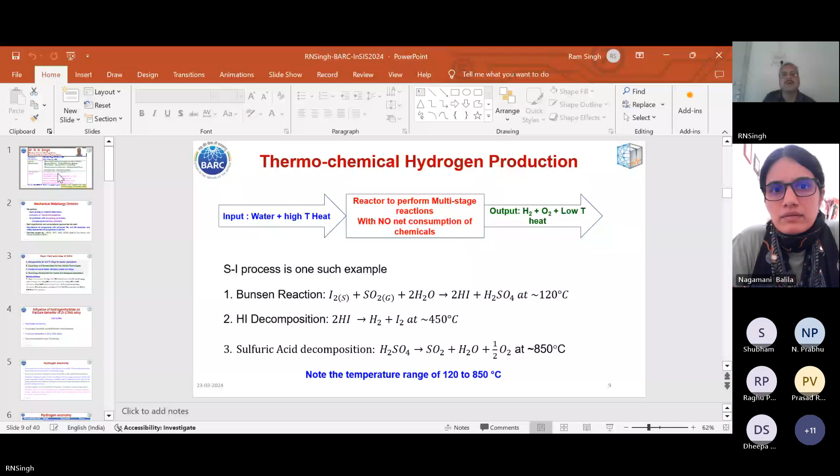Are you able to see this slide? Yes, yes, we can see. Just wait, let me go for the slide.

Are you able to see it now? Oh, it's still in PPT mode. So you have to share your full screen, not just the tab, because sometimes it doesn't work. Okay, fine. So you can stop sharing and reshare. Correct, entire screen. Share.

Now, are you able to see the slides? Yeah, slides we can see, and also the full screen. Thanks, I've gone to the next slide. Are you able to see the next slide also? Yes, the first slide, now the next slide. Yeah, there's a little bit of lag, but it's fine.

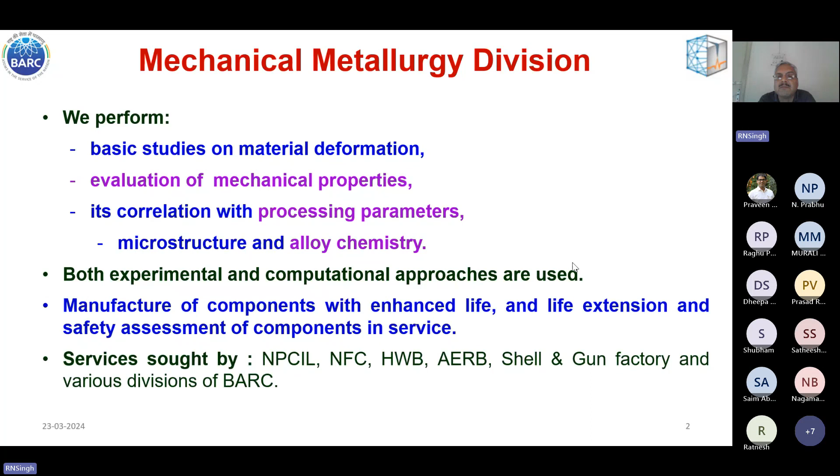Thank you, Professor Jaya, for your kind introduction. Just before we start the presentation, I want to share what we do in the Mechanical Metallurgy Division. Basically, we perform basic studies on material deformation, evaluation of mechanical properties, and their correlation with processing parameters, microstructure, and alloy chemistry, using both experimental and computational approaches. Our input is required for manufacture of components with enhanced life, life extension, and safety assessment of components during service. Our expertise is sought by various units of DAE like NPCIL, NFC, Heavy Water Board, Atomic Energy Regulatory Board, and various divisions of BARC.

Am I audible enough? Yes, yes, everything is yes, sir.

The major R&D activities being pursued by my division fall into four major categories. The first is new generation zirconium and titanium alloys for various reactor applications. The second is superalloys and borated steels, again for nuclear applications. Third is nuclear structural steels, refractory metals and alloys, development of these materials. And finally, the fourth group is technology development for nuclear and aerospace applications.

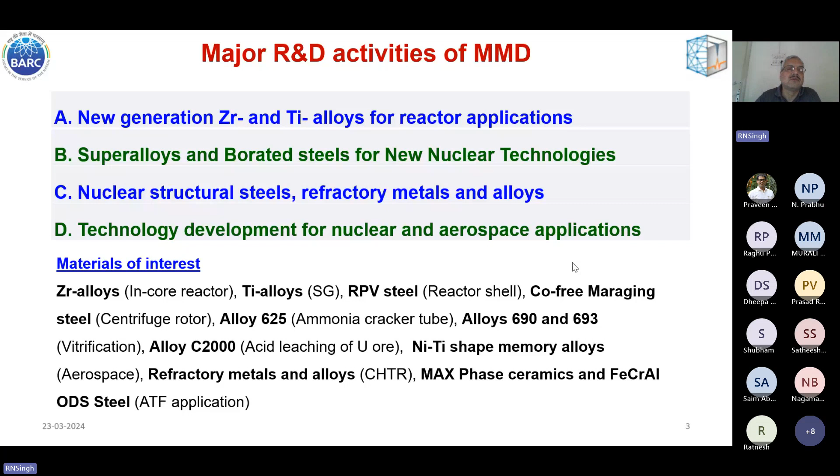Materials of interest to us are zirconium alloys, titanium alloys, RPV steel, cobalt-free maraging steel, alloy 625, alloy 690, alloy 693, alloy C2000, nickel-titanium shape memory alloys, which earlier Dr. Madhur Gopal was working on, and now my colleague Dr. Vikas Manji is continuing this work. Also refractory metals and alloys for compact high temperature reactors, and MAX phase ceramics for accident tolerant cladding. I think FeCrAl is also for the same purpose.

Today's talk, I have given the topic as the influence of hydrogen or hydride on fracture behavior of zirconium 2.5 Nb pressure tube material. However, based on the work we have done, and since we are all talking about hydrogen economy now, I just wanted to flag this issue and suggest what areas we mechanical metallurgists, or those concerned with structural integrity, should be working on.

So this is my personal view, it is not my department's view. Before I go on to the actual topic of hydride embrittlement of zirconium niobium alloy, I'll be talking a little bit about hydrogen economy, present various mechanisms of hydrogen or hydride embrittlement, and finally I'll come to the fracture behavior of this alloy.

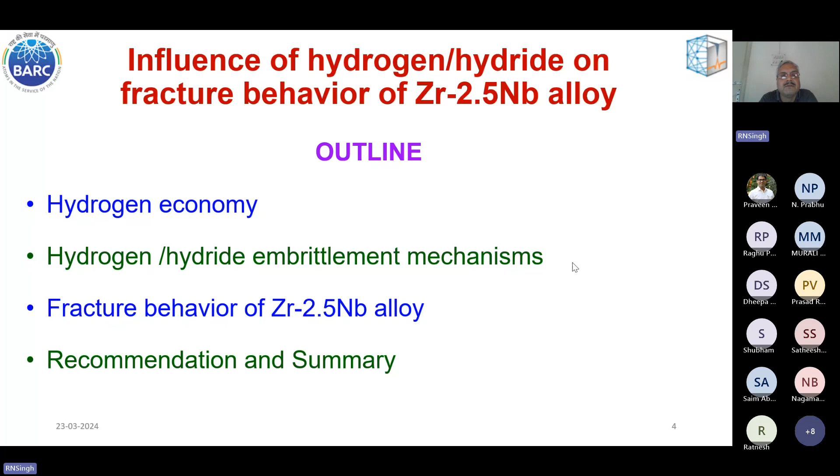In the hydrogen economy, to arrest the effects of climate change, the United Nations has identified 17 sustainable development goals. Goal 7 aims to provide clean and affordable energy. Over the next few decades, the hydrogen economy can either partially or fully replace the fossil fuel economy.

This third statement is very powerful, and I've tried to summarize its present status. Production, packaging, storage, transfer, and delivery of hydrogen are all energy-consuming steps. Over the next decade, competition between adherence to the idealistic scientific goal of replacing fossil fuels with hydrogen, and finding a practical economic solution involving a combination of several technologies, will decide the growth of the hydrogen economy.

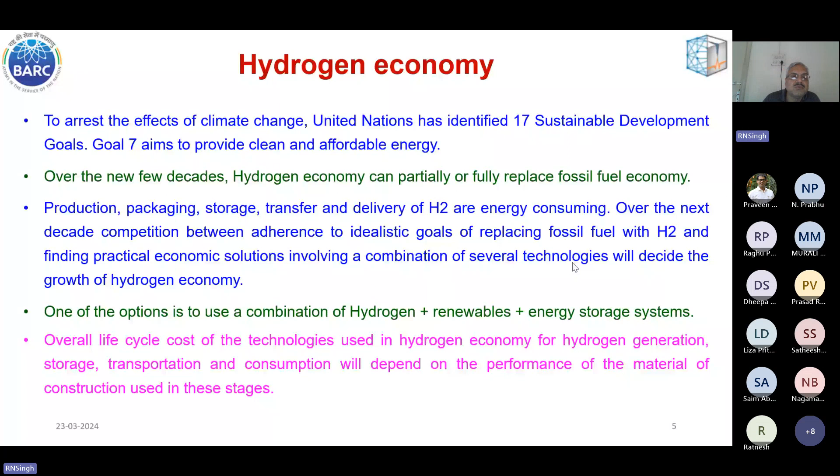One option being seriously explored is the combination of hydrogen, renewables, and energy storage systems. The overall life cycle cost of technology used in the hydrogen economy for generation, storage, transportation, and consumption will depend on the performance of materials of construction used in these stages.

So these are the 4 stages: hydrogen generation, storage, transportation, and use. Coal, oil, and steam reforming are still the 2 major forms in which hydrogen is being generated. But water electrolysis has a scale-up advantage; if adopted, large-scale hydrogen production can be achieved.

Water electrolysis can be done by obtaining electricity from nuclear, solar, wind, hydro, or wave sources. Water splitting using thermal heat is also possible, with heat provided by nuclear or solar sources. Biomass fermentation and its pyrolysis is another method of hydrogen generation.

For storage, hydrogen can be used in pure form without transformation: as gaseous hydrogen at very high pressure, or liquid hydrogen at low temperature, or a combination of both low temperature and high pressure, again as gaseous hydrogen. It can also be stored in a metallic lattice.

It can also be stored in chemical forms like ammonia, methane, methyl alcohol, synthetic fuels, and green ammonia. So these are the methods in which it can be stored. Each method has its own advantages and disadvantages, which we'll cover later.

For transportation, gaseous hydrogen and liquid hydrogen can be transported in the form of tankers, pipelines, or trailers. For end use, stationary hydrogen is used in refineries for production of steel.

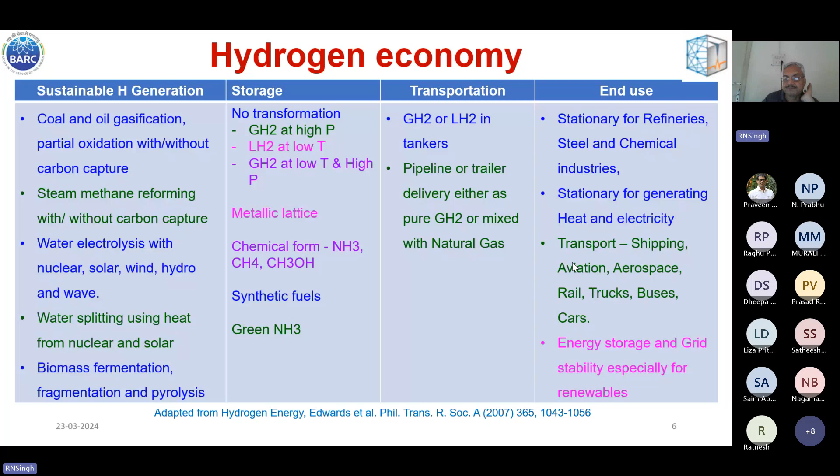For hydrogen, different color codes are being followed, though there is no standard on this. The first is gray hydrogen, which is generated from fossil fuels with CO2 emission. The output is hydrogen gas and CO2, with no effort made to capture the carbon dioxide produced in this process.

This does not lead to any change in environmental impact because the CO2 is already being released; it does not reduce the impact of CO2 on the environment. But if you produce hydrogen from fossil fuels while capturing this carbon dioxide, here too it is not full capture, only partial capture.

Now, pyrolysis of fossil fuels: natural gas plus air is the input, subjected to high temperature exposure, and the output is hydrogen plus carbon in solid form. Here, the entire carbon is getting captured, so this is good for the environment.

The third and last method is electrolysis, and depending on the source of electricity, we have different color codes. Green hydrogen is where electricity is obtained from renewables. Pink is where electricity is obtained from nuclear. Yellow is where electricity is obtained from the solar grid. Ultimately, in all these cases, hydrogen and oxygen are produced.

Presently, global hydrogen production from natural gas and coal is about 76% and 23% respectively. Approximately only 1% of hydrogen comes as a byproduct of alkaline electrolysis used to produce chlorine and sodium hydroxide, and only 0.1% of hydrogen produced is by water electrolysis.

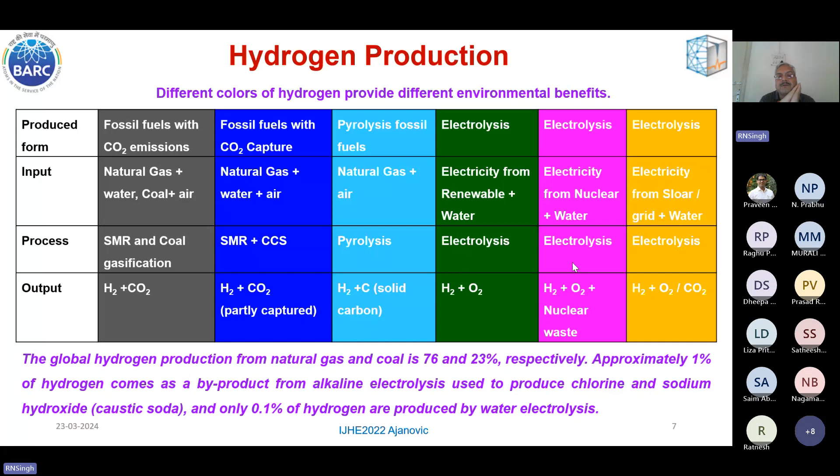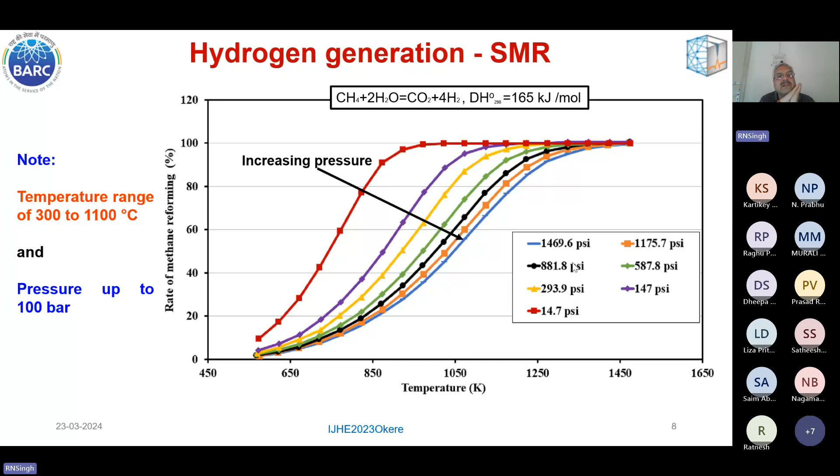Next few slides will show the environment in which materials of construction have to be used. For steam methane reforming, this plot shows the rate of methane reforming with temperature. As you increase the pressure, the yield decreases, but the operating temperature also increases. The message here is that the temperature ranges from 300 to 1100 degrees Celsius, and the pressure is up to 100 bar.

Another method of producing hydrogen is thermochemical hydrogen production. Here you have a reactor which performs multi-stage reactions with no net consumption of chemicals. The input is water plus high temperature heat, and the output is hydrogen, oxygen, and low temperature heat. One example of thermochemical hydrogen production is the sulfur iodine process.

Here, first three reactions take place. The first is a Bunsen reaction where iodine and sulfur dioxide combine with water to form hydrogen iodide and sulfuric acid at a low temperature of 120 degrees Celsius. The second reaction is hydrogen iodide decomposition, which takes place at about 450 degrees Celsius. The third reaction is sulfuric acid decomposition, taking place at a very high temperature of 850 degrees Celsius.

Ultimately, both SO2 and I2 are recovered as products. So there is no net consumption of chemicals, and this kind of reaction can produce hydrogen. The input is water plus high temperature heat, and the output is hydrogen, oxygen, and low temperature heat. The temperature here ranges from 120 to 850 degrees Celsius.

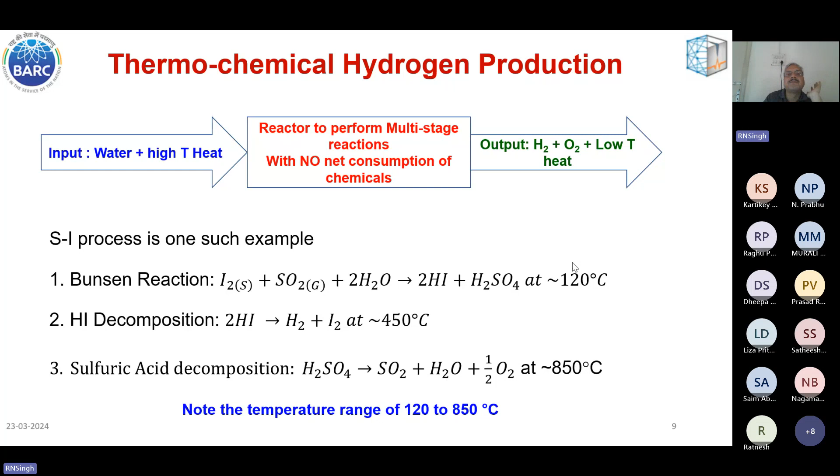For electrolytic production of hydrogen, there are three methods. First is the alkaline method, composed of electrodes, a microporous separator, and an aqueous alkaline electrolyte. In the proton ion exchange membrane method, platinum black is used along with iridium, ruthenium, and rhodium as electrode catalysts, with a Nafion membrane. For solid oxide electrolysis cells, it is essentially an SOFC working in reverse.

In the alkaline case, the temperature is only 60 to 80 degrees Celsius, pressure up to 30 bar, and efficiency about 60 to 70%, but capital investment is low. In the proton ion exchange membrane case, temperature is again 50 to 80 degrees Celsius, and pressure is 30 to slightly higher, around 80. But for SOEC, the operating temperature is 650 to 1000 degrees Celsius, with very high efficiency of 74 to 81%, and lower operating pressure.

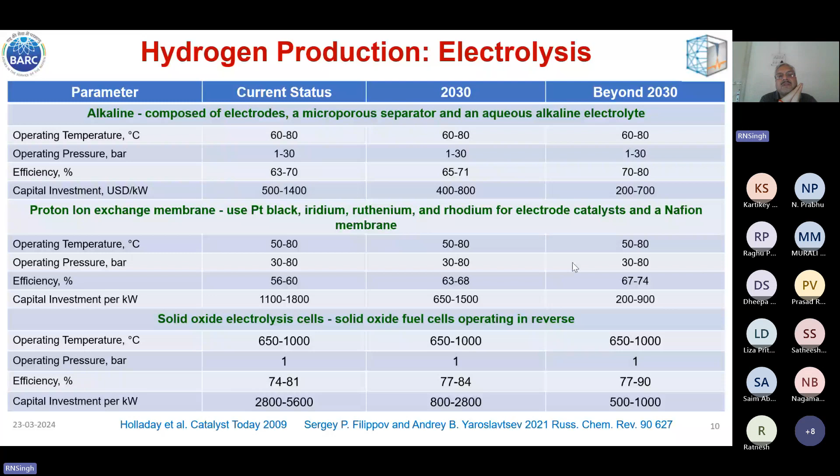So various hydrogen production methods are there, and hydrogen storage methods are there too. Whenever we talk about hydrogen storage, two parameters become important: gravimetric density, which is the percentage weight of hydrogen in the total matrix, and volumetric density, how much kg of hydrogen is stored per cubic meter.

These storage methods are listed with their operating temperature and pressure, along with advantages and disadvantages. The most commonly used method is still high pressure gas hydrogen cylinders. Here, gravimetric density is a maximum of 13%, and volumetric density is up to 40 kg per cubic meter. This can be used at room temperature, with pressure as high as 800 bar. The advantage is it's a simple, well-developed technique with a very short refilling time, which is its greatest advantage.

The disadvantage is very high internal pressure requiring thick cylinder walls, so low density and large tank size are required, and there is a risk of rupture and explosion. That's the disadvantage with high pressure hydrogen cylinders.

Liquid hydrogen is also stored in cryogenic tanks. Gravimetric density depends on size, and volumetric density is much higher, 70.8 kg per cubic meter, but the temperature is minus 250 degrees Celsius. Pressure is not a concern, about 1 bar. So it has very high hydrogen density and is easy for transportation.

It also has a very short refilling time, but requires refrigeration cost, with evaporation and leakage losses. There is also risk of structural failure of tanks under high stress, especially since some BCC metals show brittle behavior at low temperature.

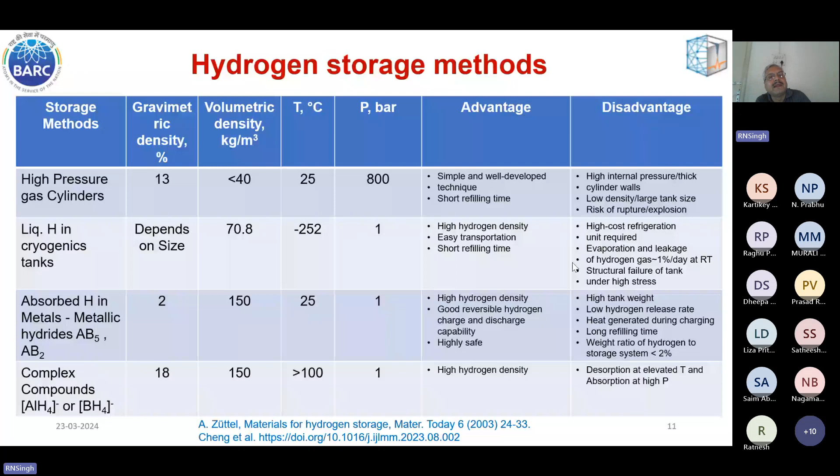In the literature, you will see that for hydrogen cylinders, we have got 5 classes: type 1, 2, 3, 4, and 5. These cylinders are made of steel or aluminium, and depending on material of construction, the maximum pressure they can hold is given. For aluminum, it could be 175 bar; for steel, it could be 200 bar. This is already being used for submarine applications.

However, in order to increase the pressure, you can go for type 2 cylinders, where apart from the metal, some composite is used as a winding around the cylindrical portion of the tank. With aluminum and glass combination, we can go up to 263 bar. For steel and carbon fiber combination, we can go up to 300 bar. This is also used for stationary fuel cells and such.

In type 3 cylinders, there is a metal liner to prevent permeation of hydrogen. This liner could be aluminum or steel, copper and such. The composite fiber used could be fiberglass, aramid, or carbon fiber overwrap. Here the pressure can go as high as 700 bar, and this is also being considered for use in vehicles.

The last type, instead of a metallic liner, has a polymer liner. The cylinder is made of carbon fiber overwrap and polymer liner, making it lightweight, with capacity to hold hydrogen up to 350 to 700 bar. Again, this application is for vehicles only. Nowadays people are thinking of making the cylinder with fiber itself as a composite, and it can go up to 1000 bar; this is being considered for aerospace applications.

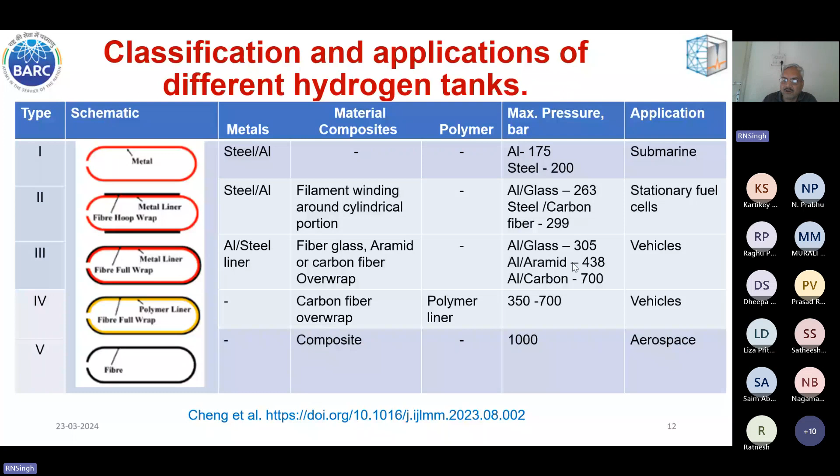Now the summary of these hydrogen storage systems is provided in this slide. On the y-axis we have volumetric density, and on the x-axis we have gravimetric density. You can see liquid hydrogen lying here, and if you look at any high Z element for storing hydrogen, depending on the chemical formula, the gravimetric density will be limited. But if you see mixed hydrides like magnesium borohydride, aluminum borohydride, ammonia borohydride, and others, all these have very high volumetric density and gravimetric density.

Ultimately, while picking the material in which hydrogen can be stored in metal, one can always think of low Z elements—that is what can find some application. This is the message coming out of this slide.

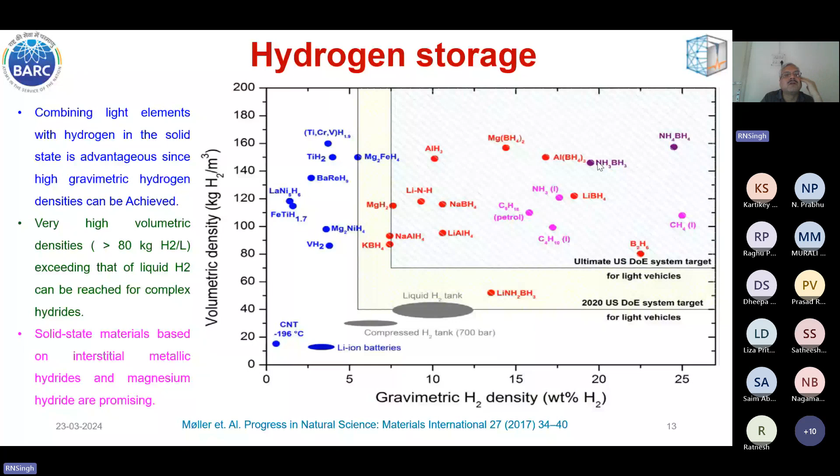Now, if you see hydrogen consumption, it can be used for transportation, for generating electricity for powering the vehicle. Some people are also thinking of using hydrogen for internal combustion engines, for SOFC, and rocket fuel. It is already being used, in the form of gaseous hydrogen or liquid hydrogen, and is already being implemented and likely to be scaled up in the near future.

As fuel and feedstock for industry, it is used as a reagent or reductant for refining petroleum, producing fertilizer, other chemicals, steel, and processing of foods—again in gaseous form. It's used for reducing sulfur in petroleum, producing ammonia or methyl alcohol. Nowadays it has already been demonstrated that it can be used for producing steel also, especially for reducing, as in DRI, direct reduction of iron. It is also used for converting unsaturated fats to saturated fats.

Here, for all uses in industry, one can think of captive hydrogen generation. Hydrogen is also used for power generation and grid balancing, here direct combustion or SOFC, again in gaseous form. It is considered for use as a replacement or supplement for fossil fuels, and fuel for residential and commercial buildings through direct combustion. It can be stored in storage tanks, especially for colder countries.

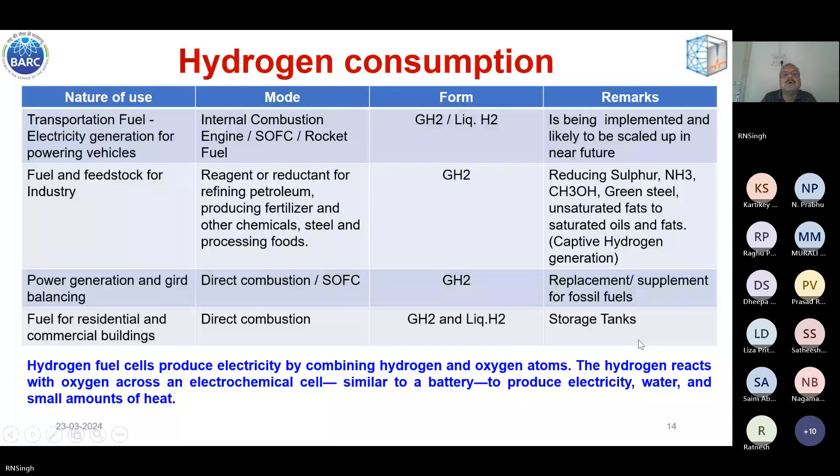Challenges posed by hydrogen are permeation of hydrogen through materials, resulting in effective leak through the materials, and degradation in mechanical properties of a structural material that compromises the structural integrity. Choice of material thus depends on the service conditions, mechanical, environmental, material condition associated with the component used.

Now, for material testing, hydrogen absorption, and diffusion out and diffusion in time, and test duration, that becomes important. Two types of test in hydrogen atmosphere can be done.

The material can be directly tested in high pressure hydrogen gas, which is an external source of hydrogen, or material can be pre-charged electrolytically with hydrogen and the test can be carried out. Hydrogen diffusivity is very important. For austenitic stainless steel, the diffusivity is less than 10⁻15 square meters per second, so a long time is required for hydrogen charging itself.

However, for a strain-induced martensite, time and pressure is significantly reduced. For pre-charged material, diffusion out time for hydrogen should be very, very large compared to the test time. Otherwise, if the test time is longer, hydrogen will diffuse out and the effect of hydrogen will not be captured. So this method is not suitable for carbon and low alloy ferritic steels or materials where diffusivity is higher than 10⁻10 square meters per second.

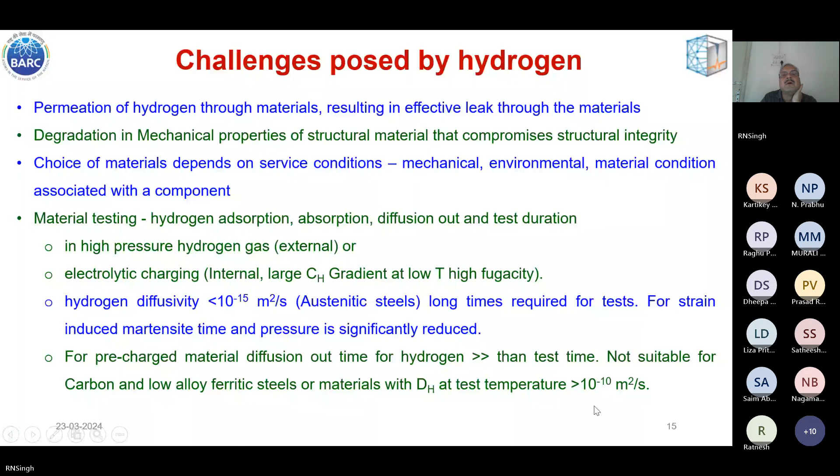Various forms of hydrogen embrittlement have been reported in literature. I have just considered only 3 of them. First one is hydride embrittlement, second is dissolved hydrogen embrittlement, and third one is hydrogen attack.

In case of hydride embrittlement, this embrittlement is caused by the formation of hydride precipitate. In case of steels and all, this hydrogen embrittlement is caused by the dissolved hydrogen in the matrix. And the third one is hydrogen attack, which occurs during service, where hydrogen can combine with other interstitials under the operating condition, and that can cause embrittlement.

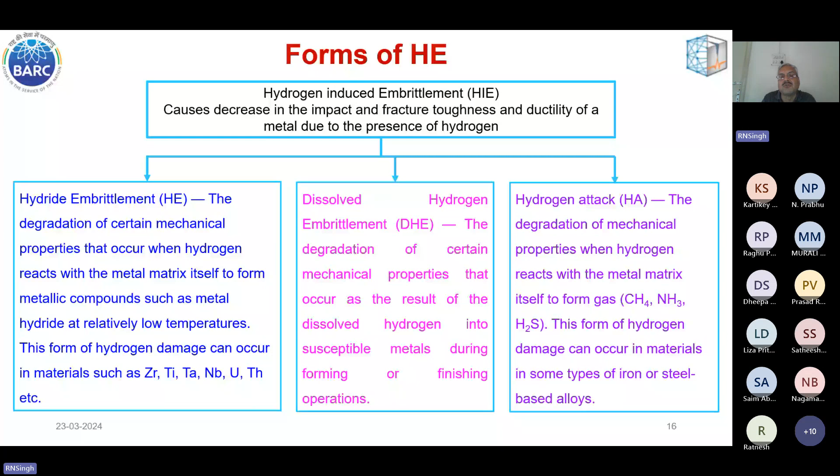Hydride embrittlement is exhibited by metals like zirconium, titanium, tantalum, niobium, uranium, thorium, etc. Common steel and all show dissolved hydrogen embrittlement. And hydrogen attack, I said, it is some types of iron and steel based materials during operation in power and process industry at a temperature about 500 degrees Celsius, that exhibit this kind of failure.

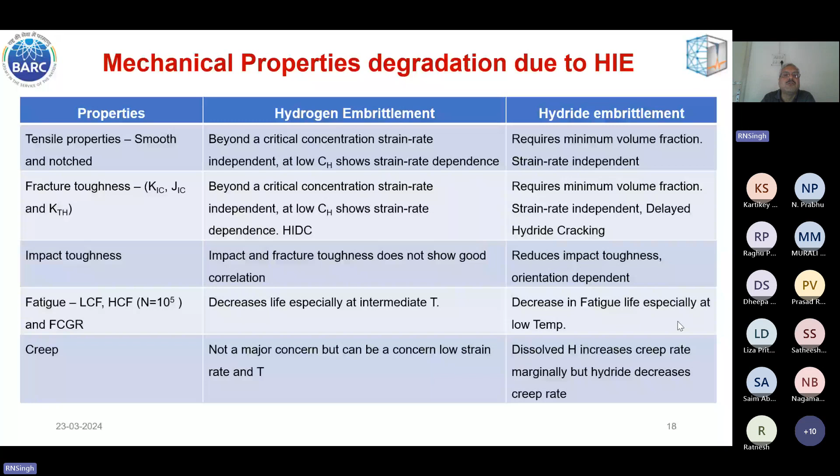Here are some illustrations of hydrogen-induced embrittlement. If you see applied stress versus time to failure, as the hydrogen concentration decreases, this curve becomes almost horizontal. This shows the effect of hydrogen: if hydrogen is present, even at low stress this component can fail.

The fracture stress also shows the effect of strain rate. At lower strain rate, you can see fracture toughness is very low and fracture stress is low. In the unembrittled condition, you have this dotted line, and because of hydrogen this has come down.

Here, log of crack velocity versus stress intensity factor is shown. Though threshold stress is not getting affected, in the plateau region crack growth rate is increasing with increase in hydrogen concentration. Here it is shown as stress intensity factor range, and here threshold is getting affected.

In air, the curve is like this. In hydrogen, the curve moves toward the left, meaning crack growth rate has increased, and the threshold stress intensity factor range has also reduced.

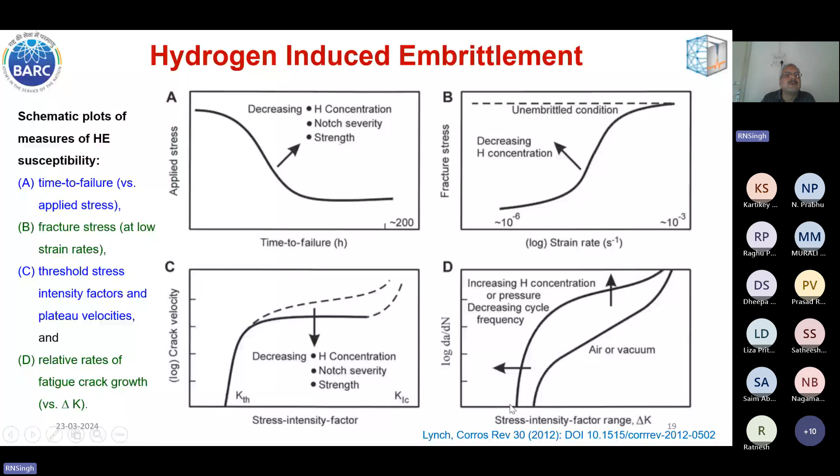Here hydrogen pressure effect is shown: the threshold stress intensity factor as a function of hydrogen pressure. As the hydrogen pressure increases, the threshold stress intensity factor is reducing.

Here, temperature effect is shown. At low temperature, the hydrogen embrittlement effect is not there. Again, at higher temperature also it is not there. It is the intermediate temperature regime where hydrogen embrittlement effect is observed.

Here, strain range versus cycles to failure is shown. With the effect of hydrogen, you can see the curve shift toward the left. Creep also, for a material like MAR-M246, is getting affected—this is the behavior in helium atmosphere, and this is the behavior in hydrogen atmosphere.

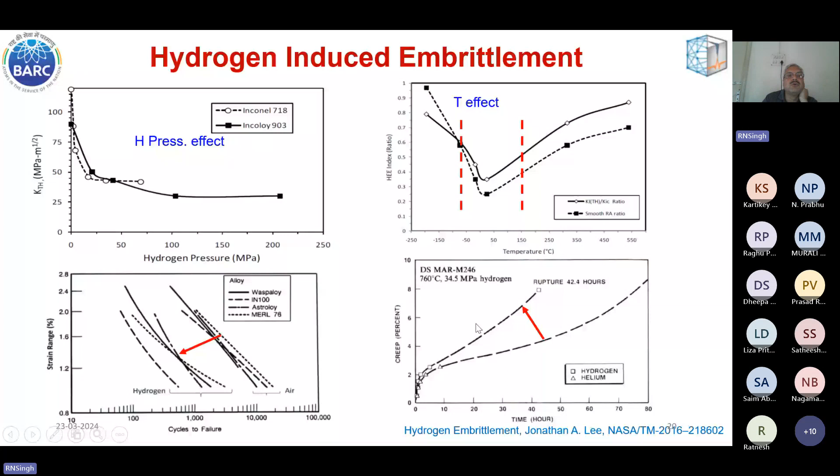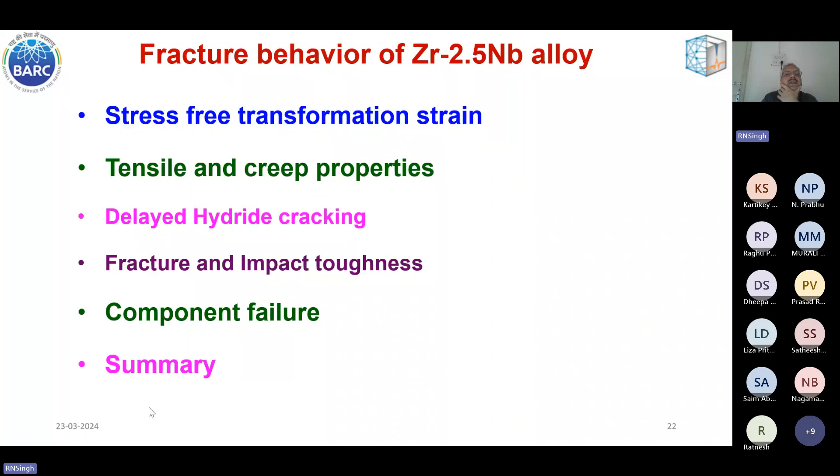Once hydrogen in excess of solid solubility precipitates out as hydrides in metals like zirconium, titanium, niobium, vanadium, etc., a stress-free transformation strain decides the shape of the hydride precipitate for solid state transformation. We know from basic physical metallurgy that in a 3D Cartesian coordinate system, if the 3 orthogonal transformation strains are equal, we end up with a spherical precipitate. If they are equal in 2 directions and less than the 3rd direction, we end up with a plate-shaped precipitate. And if it is lower in 1 direction compared to the other 2, we end up with a needle-shaped precipitate. In the zirconium-hydrogen system, hydrides exhibit a plate-shaped precipitate.

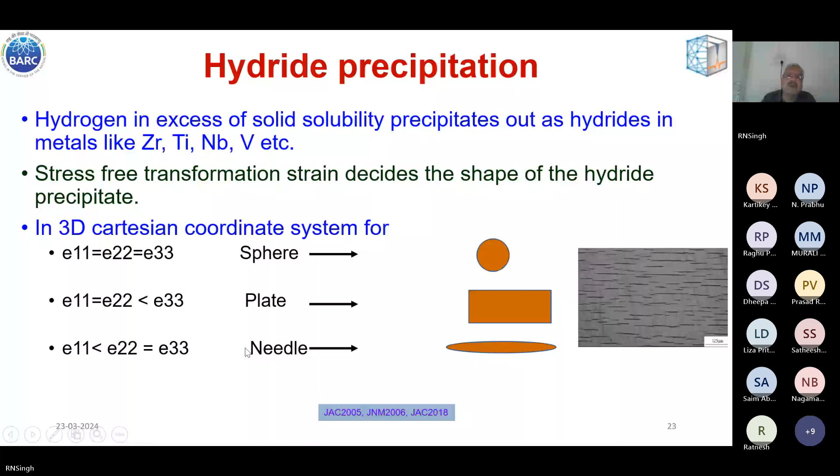So what we did is try to compute this stress-free transformation strain. Here we have alpha zirconium, which has a hexagonal close-packed structure, and delta zirconium hydride, which has a face-centered cubic structure. In 1973, in the Journal of Nuclear Materials, an article was published by Carpenter, G.J.C. Carpenter, suggesting that one can determine this stress-free transformation strain by determining the radius of the zirconium atom in the hydride and in the alpha HCP phase.

If you see this zirconium crystal structure, it has a c/a ratio less than ideal, so as a result he assumed an ellipsoidal shape of the zirconium atom. In case of hydride, since it has a face-centered cubic structure, we can assume a spherical shape of the atom. Then, based on the semi-major and semi-minor axis of the zirconium atom, one can calculate the transformation strain: E11, which is along the hydride platelet, and E22, which is along the normal to the hydride precipitate.

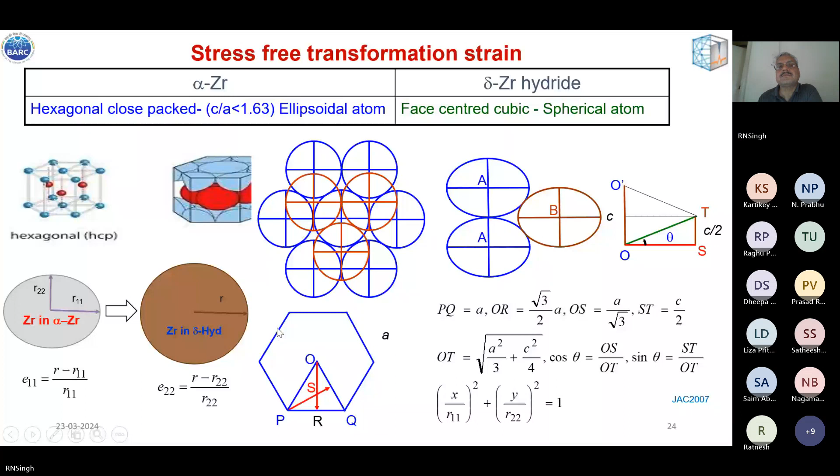Whatever stress-free transformation strain is determined using atomic dimensions is valid for the hydride precipitate. In Yamanaka et al., June 2005, they published the lattice parameter of zirconium hydride up to higher temperatures. I extended this methodology and determined the transformation strain of zirconium hydride as a function of temperature, using the lattice parameters of both the delta hydride and alpha phase, from which we determine E11 and E22.

So here E11 is shown. As you can see, with increase in temperature it is increasing, and similarly E22 also increases with increasing temperature. Using this, one can calculate the accommodation energy of hydride in the matrix. To give some numbers, the formation of delta hydride is associated with an increase in volume of about 17% at room temperature, increasing to about 20% at 300 degrees Celsius. Such a large change in volume results in local plastic deformation.

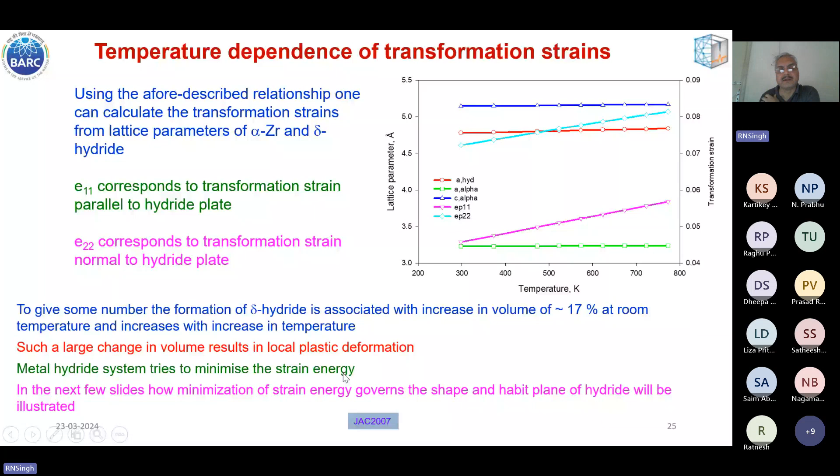The metal-hydride system tries to minimize the strain energy, and the next few slides show how this minimization governs the shape and habit plane of the hydride. If we start with a spherical hydride, there is a very high strain energy per unit volume. As you make it more and more oblate, the accommodation strain energy reduces, but we cannot keep flattening it indefinitely because as it becomes oblate, the interfacial area increases. So at some point there is a balance between interfacial energy and strain energy, and usually a 20:1 aspect ratio is observed for hydrides.

This curve is for elastic, using elastic properties of both hydride and matrix. And this is for using elasto-plastic properties of hydride and matrix. In both cases, the conclusion remains the same: an oblate, flat, thin sheet of hydride has the lowest strain energy.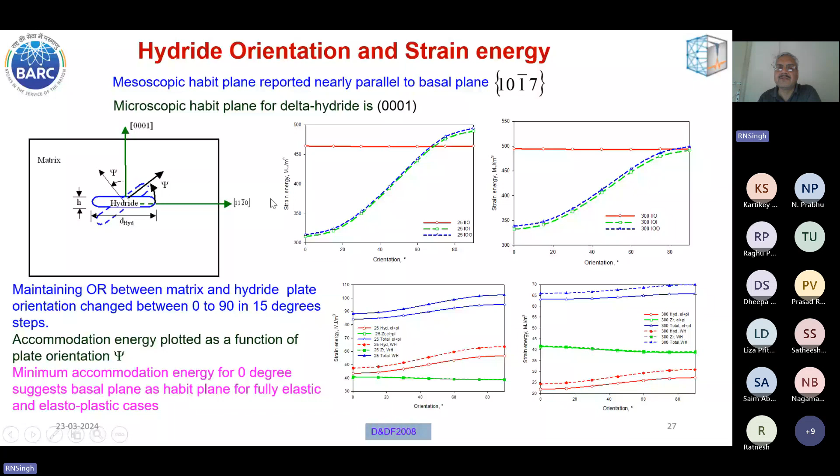For the elastoplastic case also, the results are nearly similar. So hydride precipitation is governed by crystallographic texture, prior strain and stress.

Suppose this is a section of a tube in which two orientations exist; the basal pole texture is like this: about 55% along circumferential direction, 43% along radial direction, and hardly any basal poles along axial direction. So this means crystallographically there are two orientations possible. One could be this orientation, shown as circumferential hydrides. And another orientation could be this, called radial hydride.

This radial hydride is normal to hoop stress, that's why it's shown in red color. It is most deleterious. However, the circumferential hydride, even though it is hydride, is not that deleterious because its major dimension is parallel to hoop stress, so it doesn't cause significant embrittlement.

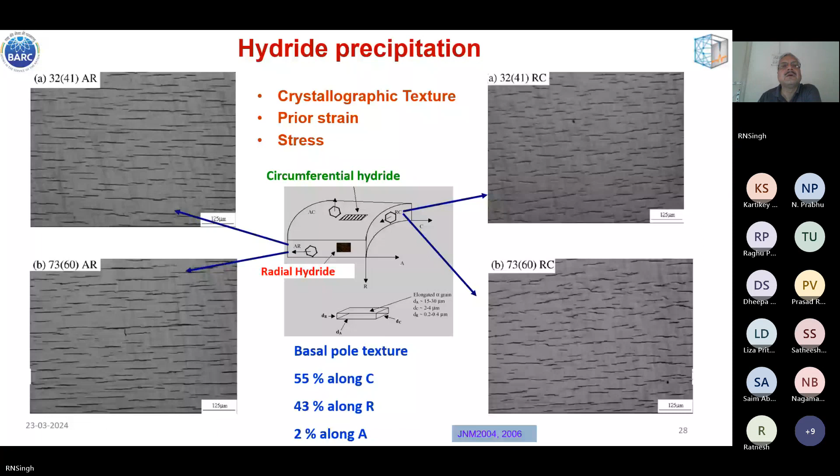The effect of hydrogen on tensile property is shown here. Lots of curves are there, but ultimate tensile strength and total elongation are plotted here as a function of hydrogen concentration. This boundary you see, shown in cyan color, changes because the temperature of the test changes from 25 to 300, 350, 400, 450, and 600. As a result, the dissolved hydrogen concentration is changing.

As I said earlier, in case of a hydride forming metal, depending on the test temperature, part of the hydrogen will be present in solution and part will be present as hydride. The cyan color is the region where hydrogen is present in solution, and the dark color is the region where hydrogen is present as hydride. You can see that when hydrogen is present in solution, the ultimate tensile strength is reduced, but when hydrogen is present as hydride, there is a marginal increase in ultimate tensile strength.

This is consistent even at 400 degrees Celsius: you see UTS decreasing with dissolved hydrogen concentration, but when hydride is present, there is a marginal increase. Same at 450, same at 600 degrees Celsius. If you see total elongation, it shows the reverse behavior. Of course, hydride causes embrittlement, so ductility is reduced.

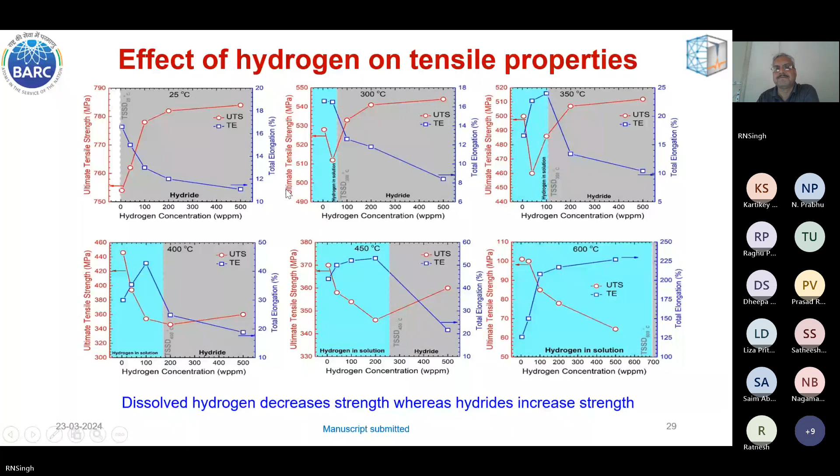Now another plot is for creep properties, the effect of hydrogen on creep properties. This test is still our unpublished work; we have been able to complete it only at 400 and 450 degrees Celsius. The same color code has been followed. If you see the cyan color region, dissolved hydrogen increases the minimum creep rate marginally, and in case of hydride, it reduces the minimum creep rate. At 450 degrees Celsius, the effect is not much, almost horizontal lines are there.

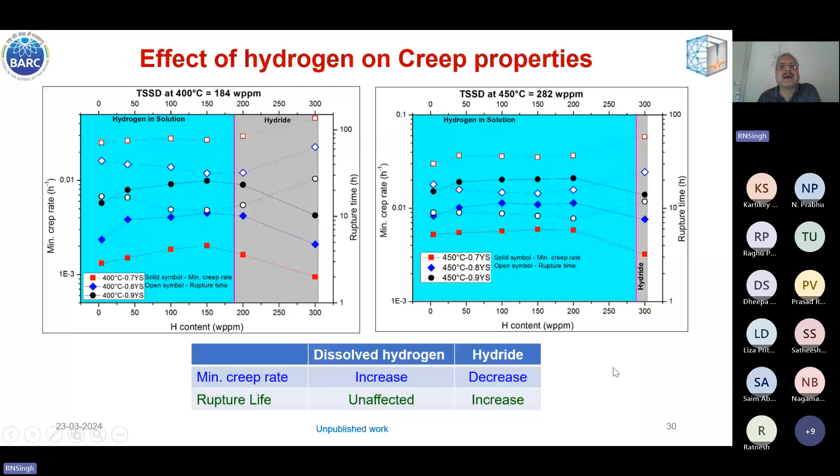Now coming to delayed hydride cracking: it is caused by hydrogen migration up the hydrostatic stress gradient. Near the crack tip, hydride precipitation takes place. For pressure tube material, this hydride precipitation has radial orientation. This radial hydride grows to a critical size, and once it attains that size, it fractures and crack growth takes place. This whole process repeats, and the cracking is delayed by the time required for hydrogen to diffuse to the crack tip and form a hydride of critical size, which is why it is called delayed hydride cracking. The evidence for this comes from the fracture surface also.

The fracture surface is marked by striations, that is, alternate bands of bright and dark regions.

This bright region is due to ductile tearing of the matrix, and the dark region in between is due to cleavage of hydride. If hydride and matrix had debonded on the fracture surface, at least some portion would show only the bright region, but that is not the case. This suggests that it is the hydride which cleaves apart, and debonding between hydride and matrix does not take place.

This DHC behavior is characterized by two important parameters: the delayed hydride cracking velocity, and the threshold stress intensity factor. In the plot of delayed hydride cracking velocity as a function of stress intensity, a threshold value is observed below which this velocity is insignificant. As stress intensity increases, DHC velocity initially increases, and then reaches a plateau region where it becomes independent of stress intensity factor.

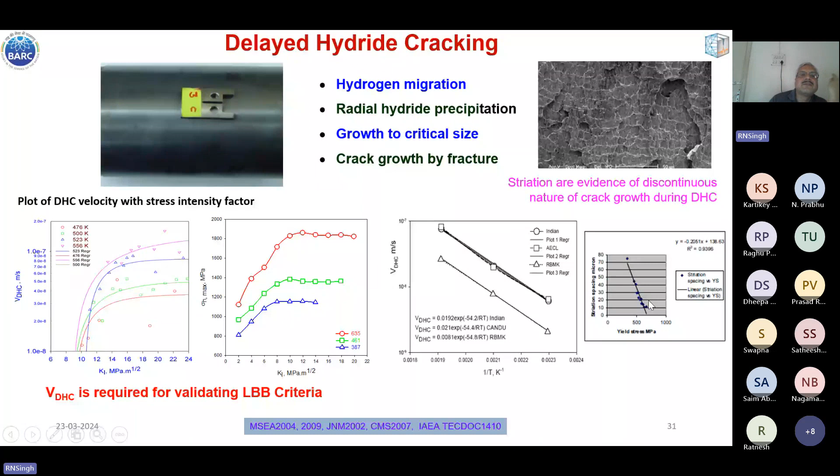Now, fracture toughness—again hydrogen is important here. DM represents the double melted material, and QM represents the quadruple melted material. Initially, pressure tubes were manufactured from ingots produced by double melting, and we tested the material up to 100 ppm hydrogen, with all three curves lying almost overlapping with each other. So no significant embrittlement effect is observed.

However, when we did the same test on the tube produced from quadruple melted ingots, at room temperature, initially the toughness is very high. By adding 30 ppm hydrogen, there is a sharp reduction in fracture toughness, and after that, with further increase in hydrogen content, there is no change in fracture toughness. As you go to higher and higher temperature, the effect of hydrogen gets reduced.

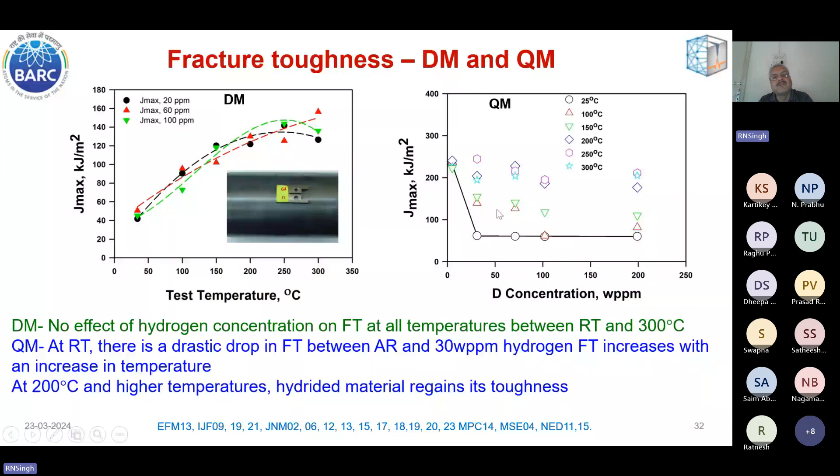Now, this is another illustration—we did FEM calculations of the stress field in the hydride and the surrounding matrix. Depending on the tendency of hydride to grow or shrink: during heating, the hydride will shrink and contract, whereas during cooling, the hydride will expand and precipitate out. During cooling, you can see inside this boundary—this is my hydride, initially zirconium, transformed into hydride, surrounded by matrix. We did this calculation for that case.

We see that inside the hydride we have compressive stresses, and just outside, in the matrix, we have tensile stress. However, when you heat the same sample and dissolve it back, what you get is surprising—now inside the tip of the hydride you have a tensile stress, and the nature of the stress in the matrix just outside has been reversed. These calculations were done at various temperatures. The dotted line shows the contraction case, and the solid line shows the expansion case.

We thought, I don't know whether this is just FEM calculation where we have got some numbers, or whether it will have any effect on fracture toughness.

So here we show the plot of the J parameter with delta A. For the heating curve, the J curve is like this, and for the cooling curve, it is like this. The plot of J max with test temperature is shown here. At the lower shelf and upper shelf, the difference is not much, but in the transition regime, both heating and cooling are having some effect on fracture toughness.

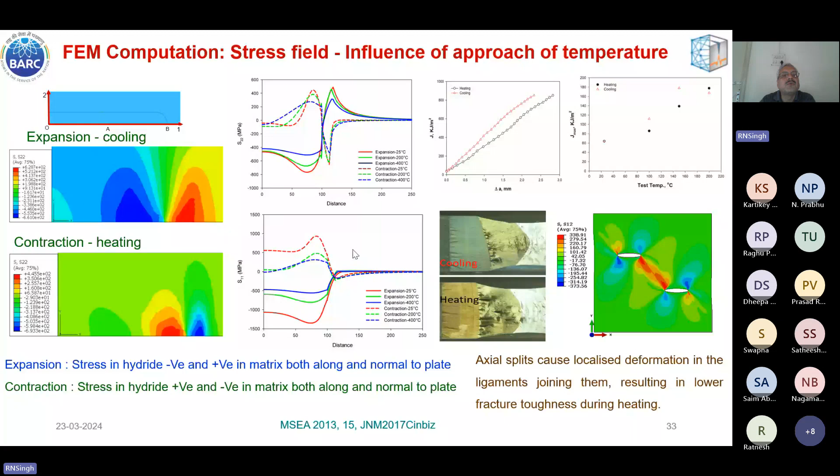So finally, some observations: the stress component inside the hydride normal to the hydride platelet during heating, as it is shrinking, is tensile in nature. So if a tensile stress is inside the hydride, it will favor axial splitting and may result in increased fracture toughness due to delamination. In fact, we did observe larger axial splitting in the heating case.

However, during cooling, it is compressive in nature, so there is no axial splitting; it will suppress axial splitting. The stress component inside the matrix normal to the hydride plate is compressive in nature for the heating case, which prevents crack growth through the matrix and may result in increased fracture toughness. However, in the cooling case, inside the matrix it is tensile in nature, which facilitates crack growth through the matrix, and may result in reduced fracture toughness.

A consequence of axial splitting is that it causes localized deformation in the ligaments joining axial splits, which may lower the fracture toughness. Since no axial split is observed in the cooling case, chances of localized deformation are minimized, which may result in higher fracture toughness. Ultimately, axial splitting and localized deformation are what affect the fracture toughness, and that's why in the heating case, we end up with lower fracture toughness.

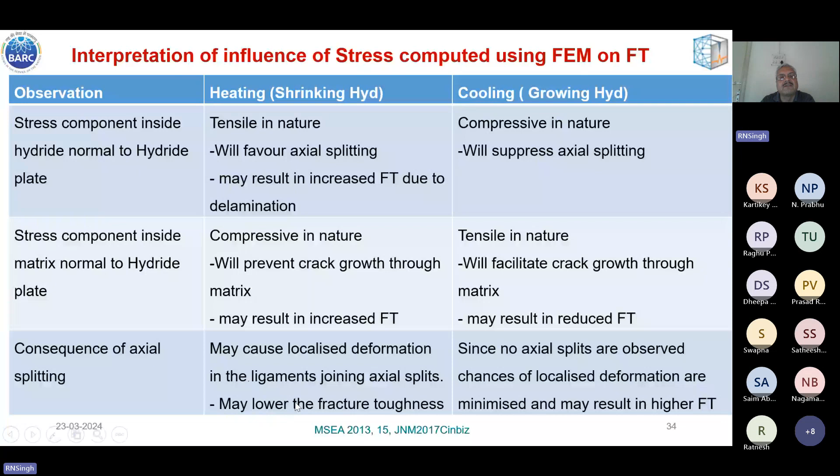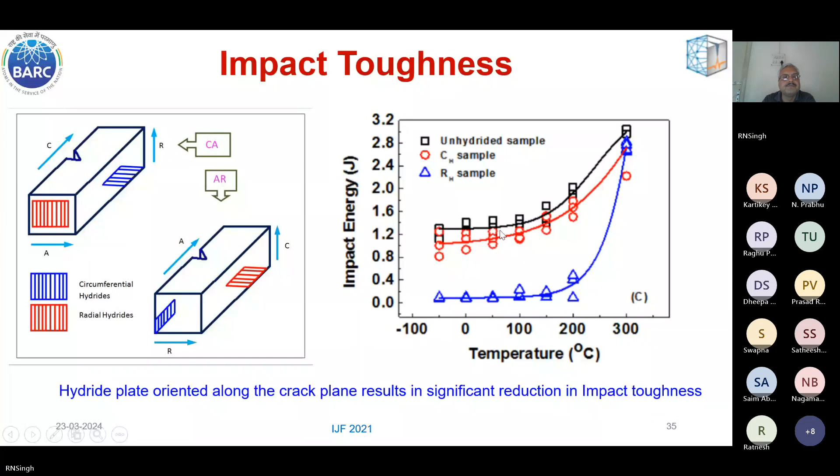Now we have determined this fracture toughness parameter, but what do we do with it? These data are required for safety assessment. There is a parameter called operating pressure. We all know that heavy water coolant is used in a pressurized heavy water reactor, and in order to attain higher heat extraction, we want to maintain the heavy water in the liquid phase, for which we have to pressurize it. So the lower bound pressure is decided by the steam table, to keep the water in liquid state.

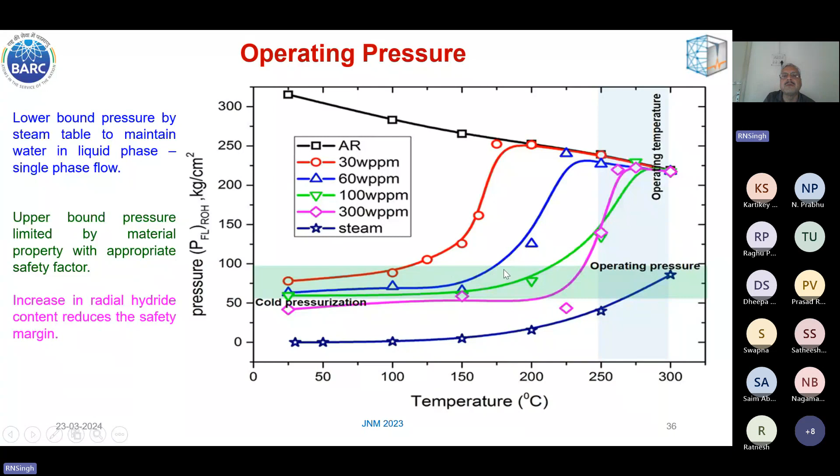Especially for radial hydrides, you can see here, if the orientation is radial, the boundary provided by the material property comes very close to the operating pressure regime. So in such cases, these tubes cannot be operated; these tubes need to be retired.

Now, another concept for pressure tube design is leak before break. It is a fail-safe criteria based on fracture mechanics, and there are three levels of LBB. Level 1 assumes there is no crack in the material, so it is inherently safe to operate the tube. But we all know that during manufacturing, some flaws will invariably be present.

So level 2 assumes the presence of a surface crack, but we assume that there is no growth of the crack. However, as we have seen, under operating conditions delayed hydride cracking can occur, and that can result in crack growth. So level 3 assumes a crack, but assumes that the leak size crack should not be more than the critical crack length. So flaw size of less than 2% wall thickness is permitted during manufacturing, and we determine the CCL by estimating the crack driving force under operating conditions.

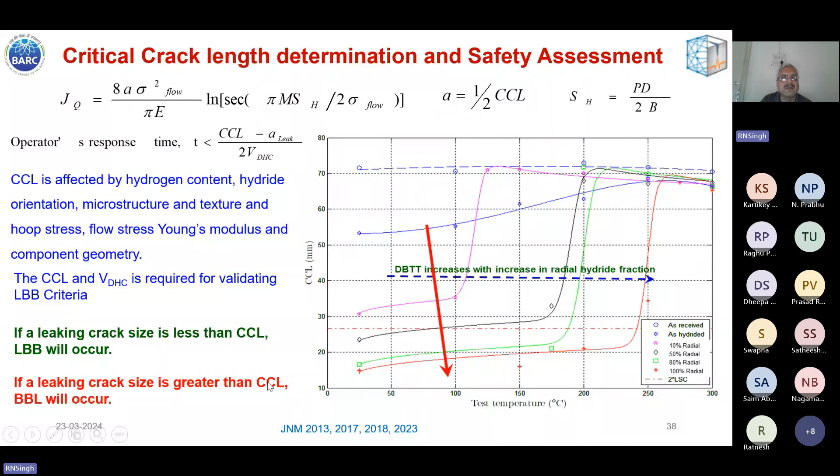So CCL is affected by hydrogen content, hydride orientation, microstructure and texture, and hoop stress, flow stress, Young's modulus, and component geometry. The CCL and DHC velocity are required for validating the leak-before-break criteria. If a leak size crack is less than the CCL, leak before break will occur. However, if a leak size crack is greater than CCL, break before leak will occur, which is not desirable.

So finally, I come to the conclusion of the second part. The multi-scale structure mechanics, starting from atomic level to component level, was illustrated through various aspects of hydrogen-related problems of zirconium alloys. Using this approach, not only the underlying mechanism can be understood, but valuable input for designers and safety engineers can be obtained.

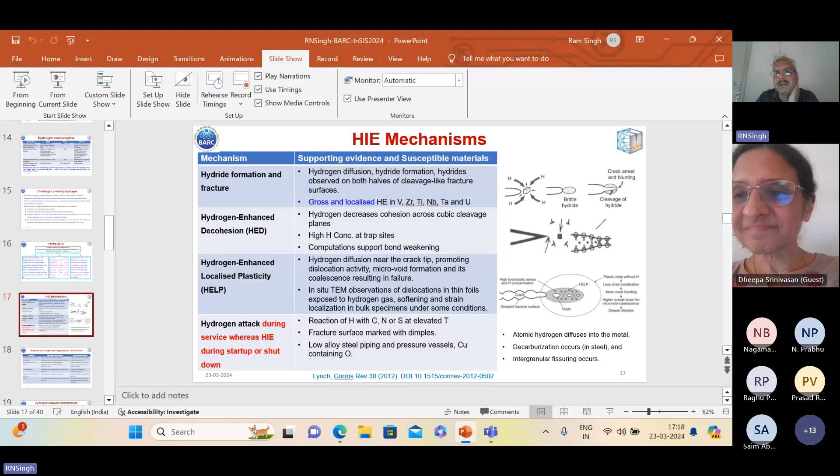I think this is slide 17 you're telling, no? Yeah, I was just wondering, how do you characterize all these, when you're looking at a fracture surface, or how do you pick signatures from hydrides? I can understand if it actually forms in the wake of the crack path, but how do you detect, what are the characterization methods to detect the presence of hydrogen and the embrittlement because of that?

Yeah, you rightly said, in case of hydride forming metals, conducting the experiment is much easier. In fact, for zirconium alloys, we determine this DHC velocity regularly. There, hydrogen does not come out of the metal system so easily. So if you recollect, there is something called pressure composition isotherm - on y-axis you have partial pressure of hydrogen, on x-axis you have concentration of hydrogen. Initially it increases linearly, then shows a plateau, and then again starts increasing linearly. This plateau pressure decides whether, if partial pressure outside the sample is more, hydrogen will go from environment into the metal, and if partial pressure is less than the plateau pressure, hydrogen will come out of the system.

So for those doing testing in hydrogen atmosphere, they should be aware of this pressure composition isotherm for the hydrogen-metal or alloy system. And if you want to see the effect of hydrogen embrittlement, you should ensure that the partial pressure of hydrogen is more than the plateau pressure. For different systems, this pressure composition isotherm is available in literature - one can start from there. And since in case of zirconium, hydrogen does not come out easily, that is another concern.

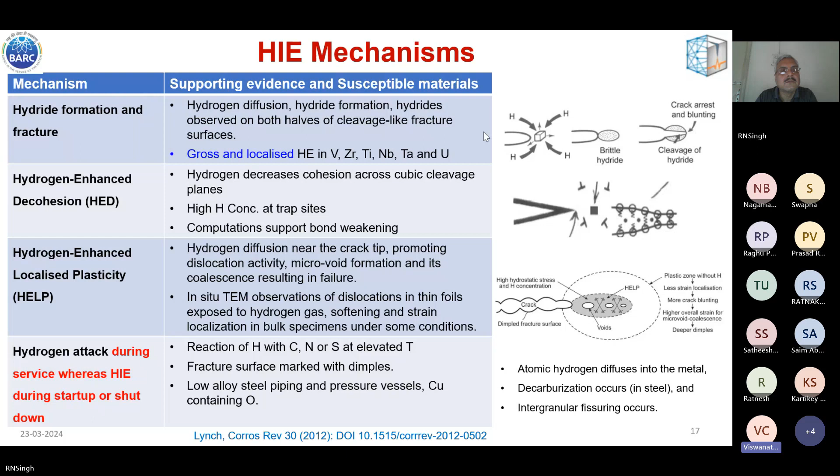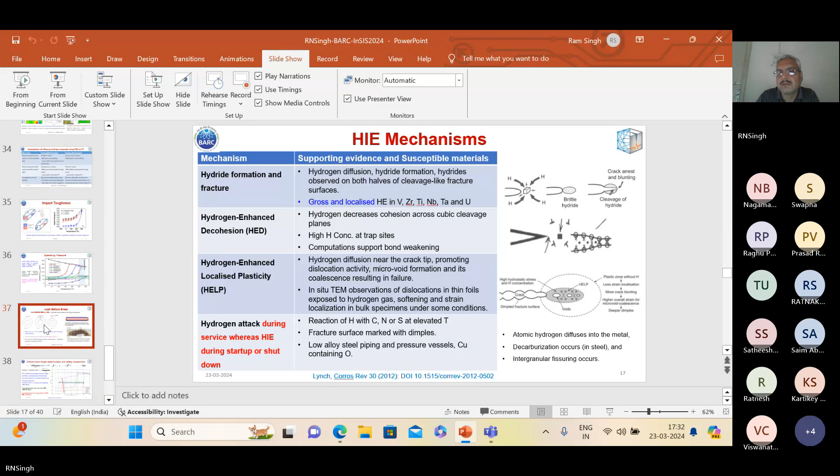Fine. Around slide 37 or so, you showed an inside groove crack, from the surface going through the thickness, where the crack front is curvilinear. In this scenario, how do you measure K, because it would have a mixed mode nature for this curvilinear front?

No, this crack is just a schematic to show that it is breaching the wall thickness. Usually these DHC cracks are very sharp. It is planar, almost like a sharp planar crack, not a volumetric flaw.

The actual flaw will have some volumetric nature also, but safety assessment has to be done under the most conservative scenario. In the laboratory, CCL and DHC velocity are determined using a fracture toughness sample which is pre-cracked. We determine CCL from both material property and operating conditions like hoop stress, wall thickness, and flow stress of the material. Then DHC velocity is determined by carrying out the sustained load cracking test.

There, a CT sample is used, subjected to a load giving a stress intensity factor more than the threshold stress intensity factor. We are more interested in knowing the DHC velocity of the plateau region, so plateau region velocity is used. So even though pictorially it is shown as a very shallow crack, for safety assessment we need to do material testing under the most conservative condition.

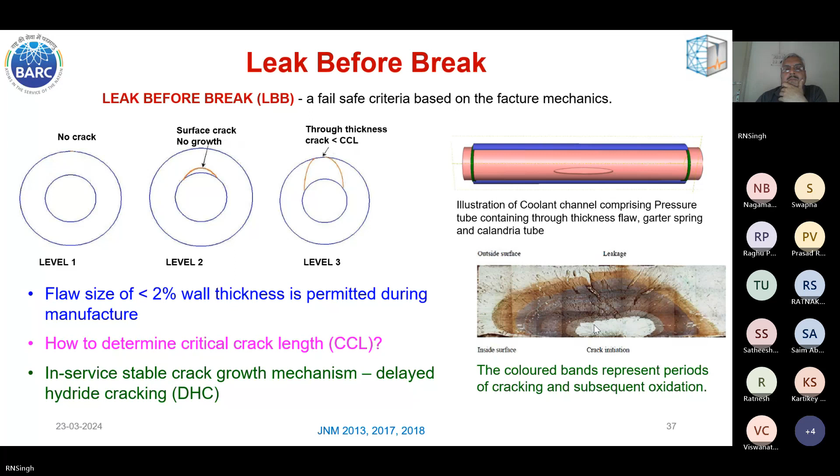Okay, just wait, I'm not able to see the question. Should I read it out again to you? It's about the modeling. Let me read the question as I've understood it. So the question is whether there is any work on crack tip modeling, at the crack tip and crack wake, under cyclic loading and hydrogen environment.

For cyclic loading, I don't think I have come across any work. Usually this sustained load cracking—you take a sample pre-charged with hydrogen, and hydrogen migrates up the hydrostatic stress gradient. If cyclic loading is there, I'm not sure what will happen. So long as a driving force is there, hydrogen will diffuse toward the crack tip. And if it's a fully reversible cyclic loading, then it may diffuse out also from the crack tip, because hydrogen will like to move to a region where tensile hydrostatic stress is there.

So cyclic loading, usually from a reactor point of view, is not of much importance for us. But of course, wherever thermal cycling is there, if coolant is leaking and so on, in that case there is also a temperature gradient. And even if there is pressure cycling of any kind.

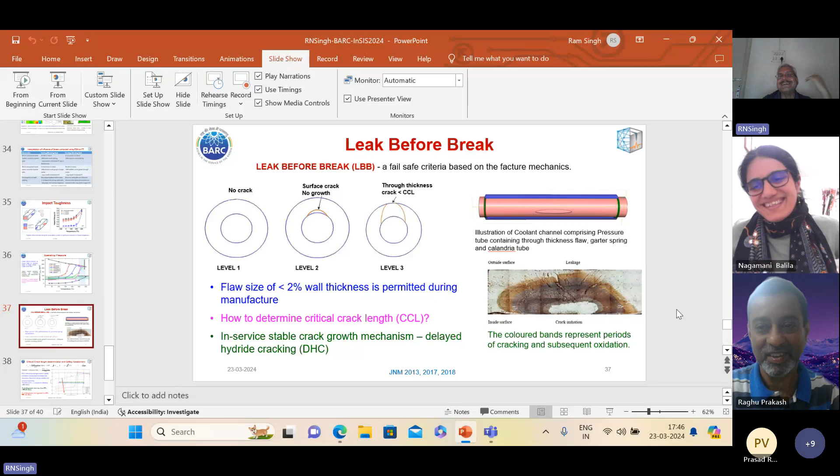Thank you, thanks a lot. Bye-bye, keep in touch. Yeah, see you. Yeah, we will. Bye.